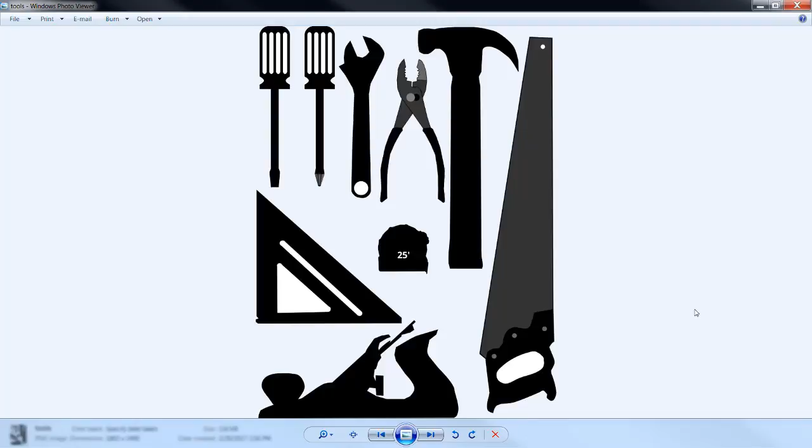What is also very nice is we have a bunch of tools that I just finished programming up for you. We're going to show you how to take what you need out of here for the sake of this tutorial. Okay? Let me pull in. This is one of the plaques right here. This is panel 44. This is what I made my shop sign on.

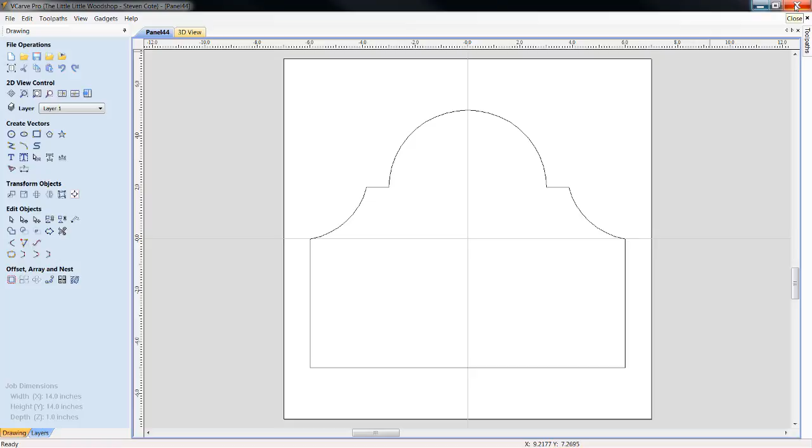And for the sake of not copying the exact same project, we're going to do a different sign layout, all right? So this is what I chose to do. I think that this looks very appropriate. It's going to look really sharp once this build is done.

First thing you're going to do is you're going to go up to your job dimension and origin. Now, for the sake of this one, I've put it on a piece of 30 by 20. We're going to use 1.5 inch pine. My datum position is always in the center. I've told you that. My unit of measure in the United States is inches. And we're going to be going off the top of the material on the Z-axis.

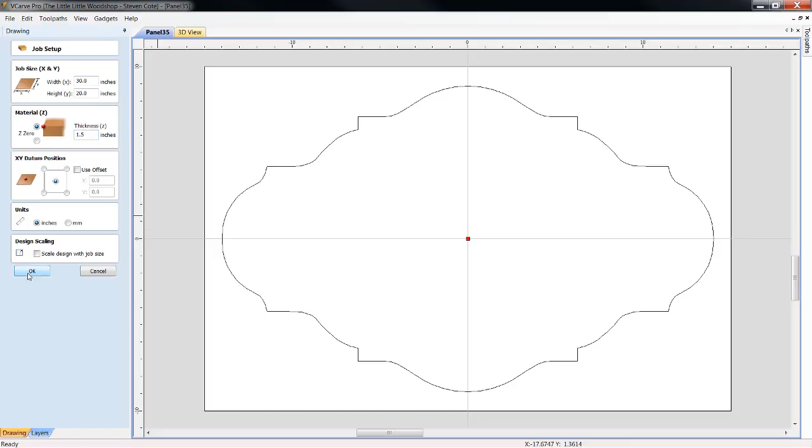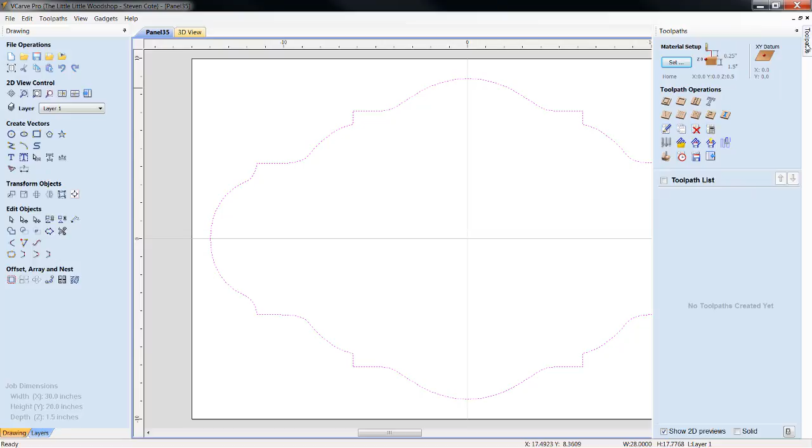We click OK. Now, ultimately, if you want to know exactly how big the exterior of your sign's going to be, we're going to click on Border. We're going to come down to Transform Objects, and we're going to look at object size. I know that I'm 28 inches wide by 17.776 inches tall. So 28 by 17 3/4 high. This will, in my opinion, make a very, very nice sign for the outside of your shop.

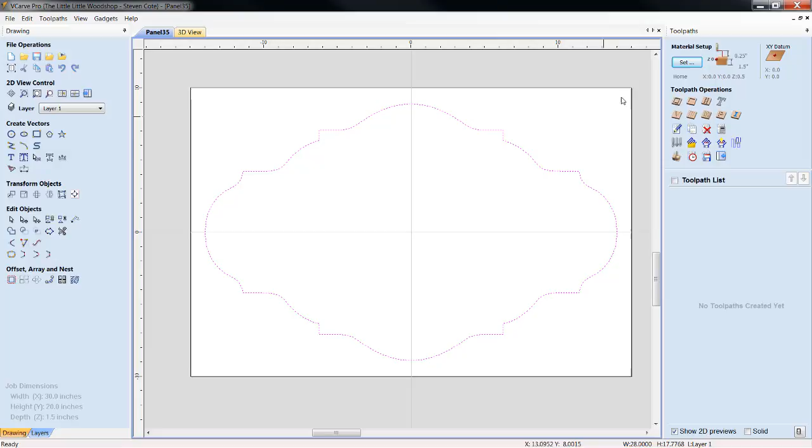All right. Well, I pretty much put a lot of bevels around things. So that's what we're going to do. Our first tool path here is going to be a 90-degree bevel around our outer edge. So I'm going to click on this. I am going to set a profile tool path in place. I'm going to want to take it down to a depth of 225 thousandths. Oh, one too many decimal points in there.

Like I said, CAD's the perfect child. It'll do exactly as it's told.

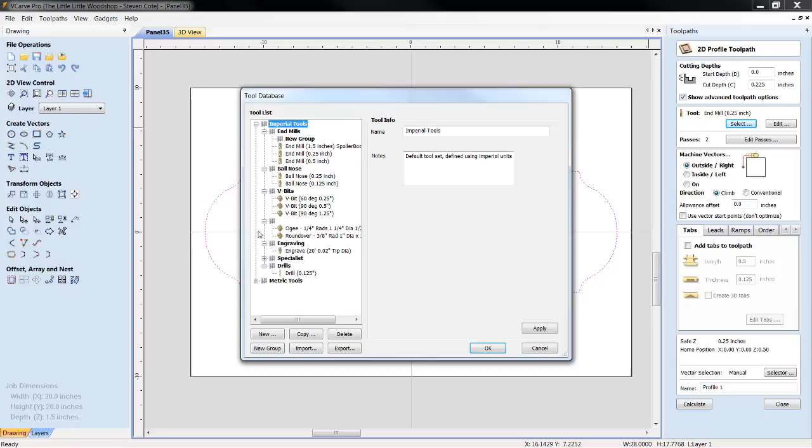I'm going to put this on the outside so that no matter where I mill, I will never lose my overall dimensions. If I come inside, well, I'll lose 1/4 of an inch all the way around, all right? We're going to select a, let me find it here, a V-bit, 90-degree, 1/2 inch. As I've told you in previous videos, always adjust your spindle, feed rate, and the information that's pertinent to your machine, to your tools, okay?

I am going to also run this conventionally, and this is going to be titled Outer Bevel. We're going to mill it. Okay, we can see the tool path is cut, but we are outside our dotted line. Alrighty.

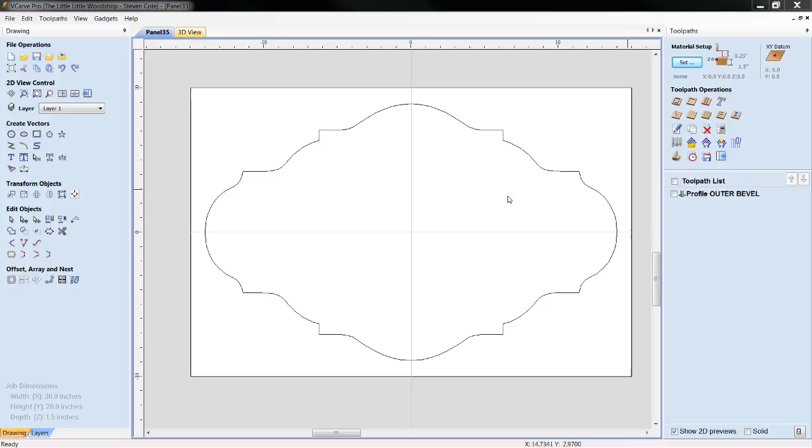Next thing we're going to do is we're going to think about an emblem. I had told you we were going to construct a logo on site. All right, well, that is exactly what we're going to do. I am going to come up to my import, or I could also go File, Open. For the sake of the video, I have already got this laid out in a folder. So what I'm going to do is I'm going to pull in the tools. Alrighty, so I want to highlight these. I'm going to move these off to the side.

My current function right now is selection mode, okay? I keep forgetting that I have a lot of newer guys following me on this stuff, so I don't mean to get ahead of myself, and if I do, I apologize.

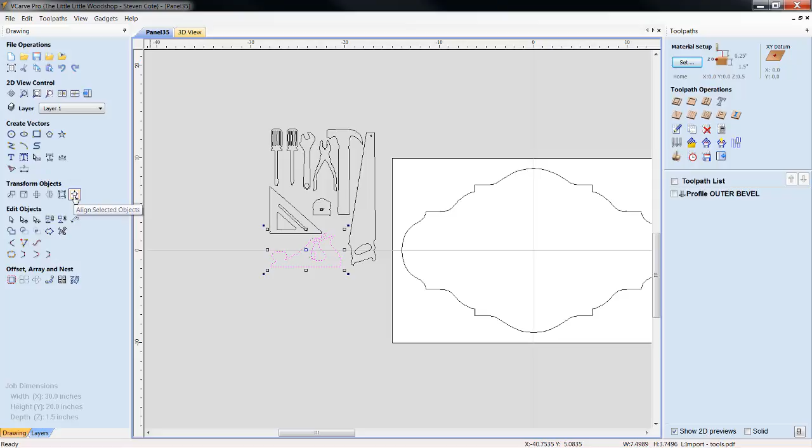The only tool I'm going to use for the sake of this is this plane. This is going to be part of our tutorial title. So I'm going to highlight this plane. I am going to click Align Selected Objects, and we're going to center him right smack dab in the middle of the material. He is perfectly aligned in the middle.

Now, what I want to do is look at his scale, and make sure that he is, in fact, going to work for this particular application. So, I am going to come over to Transform Objects, and I'm going to look at this object size. He's roughly 7.5 inches wide by 3.7496 or 3 3/4 high.

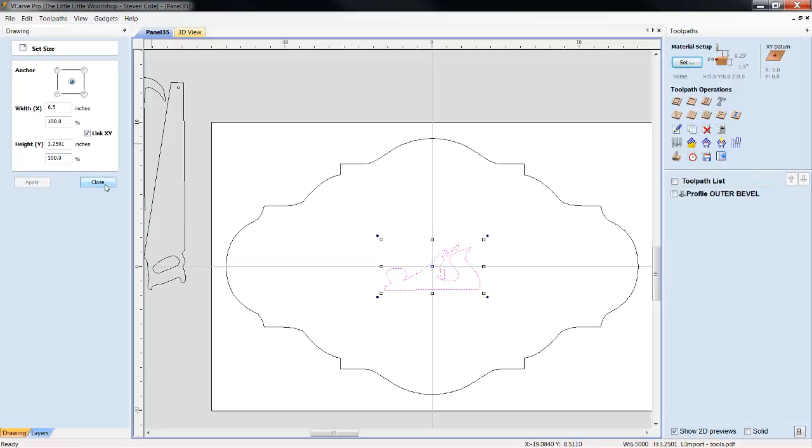Well, we're going to take him down, and as long as your link X and Y is checked, I've told you before, CAD will automatically compensate the other axis for you so that the ratio is even. We're going to go 6.5 on him. We're going to click Apply. That's not bad. So he's 3 1/4 high, but he's 6.5 wide. He's holding dead center.

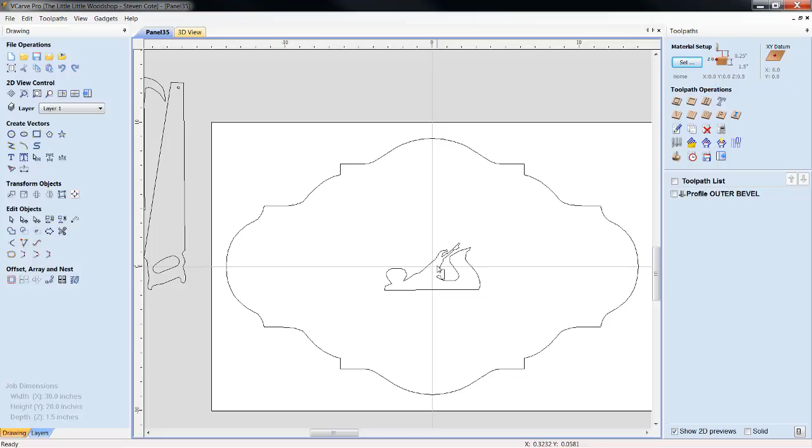Well, what I want to do is I really want to use him as my logo. We're going to name this fictitious business something like Plain Old Wood Shop, or something along that line, with the wood plane in the middle being the focal point. I know it's kind of corny, but for the sake of it, I want to create an outline to go around him.

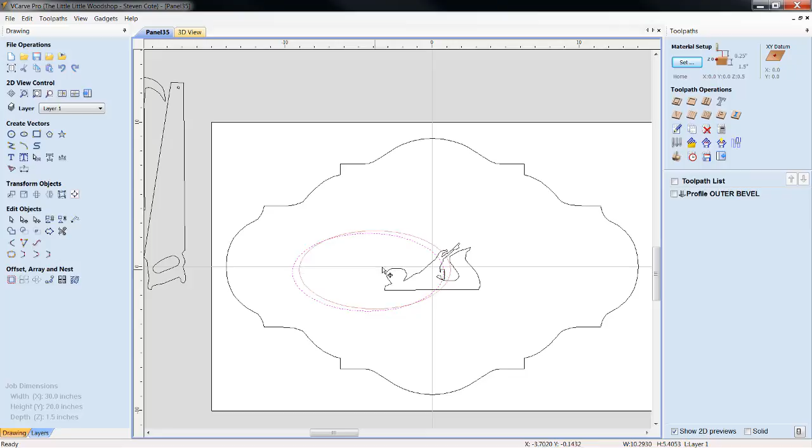I merely clicked on my Draw Ellipse, and we pulled our Ellipse tool in. And now we're going to center him. Now you can do this in one of two ways again. You can drag your center node, put him in the middle of the workpiece, or you can also pull up your Align Selected Objects, hit your alignment for dead center. Okay?

Well, I'm looking at this, and I'm not sure if he's too big or too small yet. Well, we're going to look at object size again. We'll go with 10.25. Maybe we'll go with a 10.5. Just a titch more. And it will make the height 5.5 inches roughly. Okay, I like that.

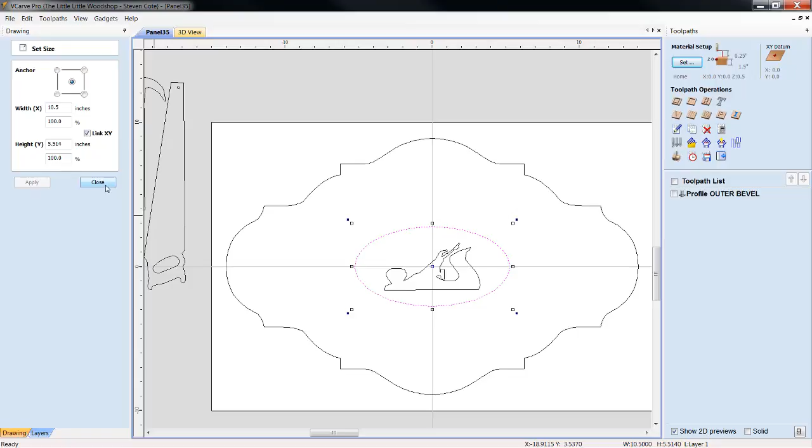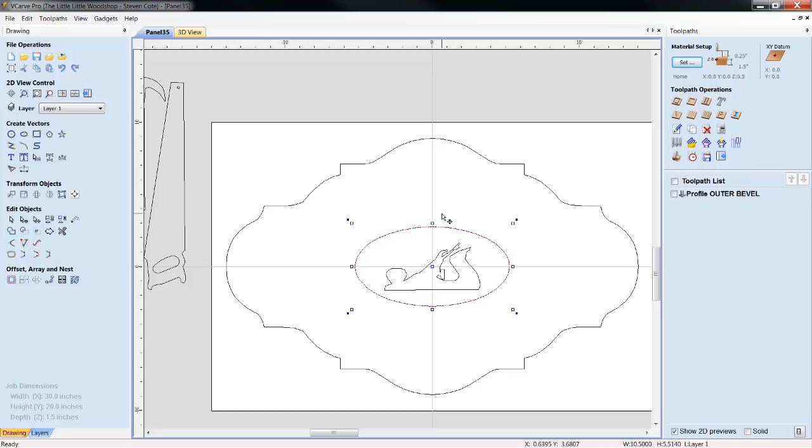We see this now. Well, what we're going to do here is we're going to duplicate this. We're going to double click on it. We're going to right click. We're going to copy. We're going to right click. We're going to click paste. With that second one that we just created, I'm going to pull him out a little. I'm going to stop. I'm going to hit the alignment tool. I'm going to recenter him.

I'm going to come down, and I am going to check out in Transform Objects the object size. Now, I would like at least 1/4 inch around this center focal piece, okay? So, we knew that he was 10.5. Well, we're going to take him up to 11.5. We're going to click Apply.

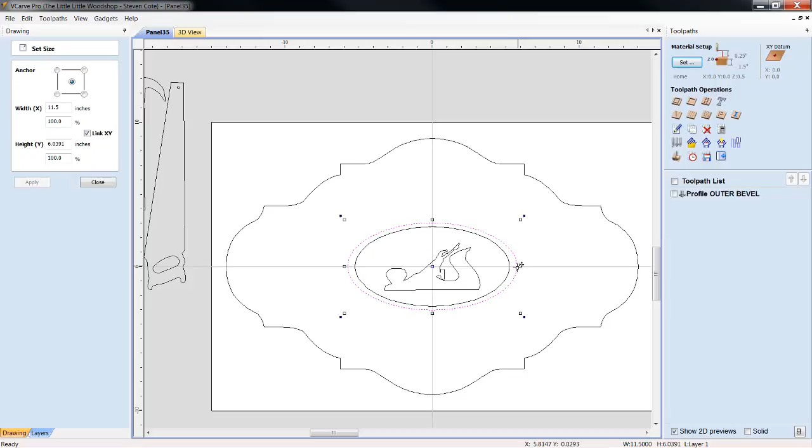Now, we've already compensated in CAD, but I can still see that the width here is a little bit off. So what we're going to do is we're going to slide one side in. You can eyeball this, okay? This is just for practice anyways. We're going to come back up to our alignment, and we're going to recenter him. All right. This is basically going to be our logo for this particular fictitious sign company.

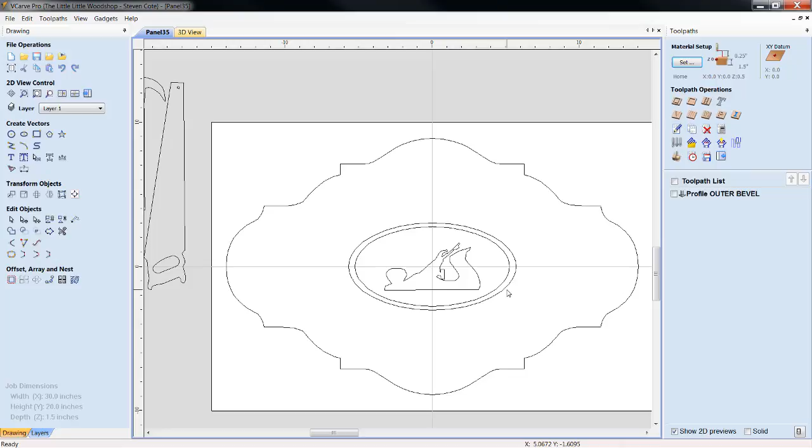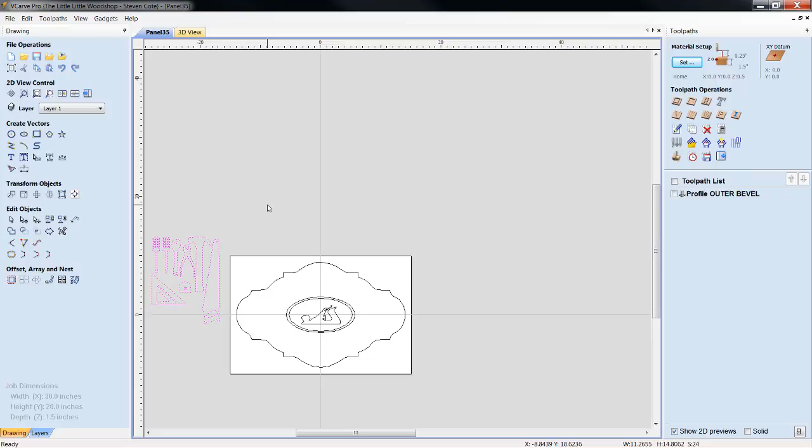Okay, now if there's nothing over here that you need, you can highlight all of it in your selection mode. Click on selection mode, hold down your left key, highlight all of it, hit the delete key on your keyboard. To basically scale him in or out, enlarge him or shrink him, you use the wheel on your mouse.

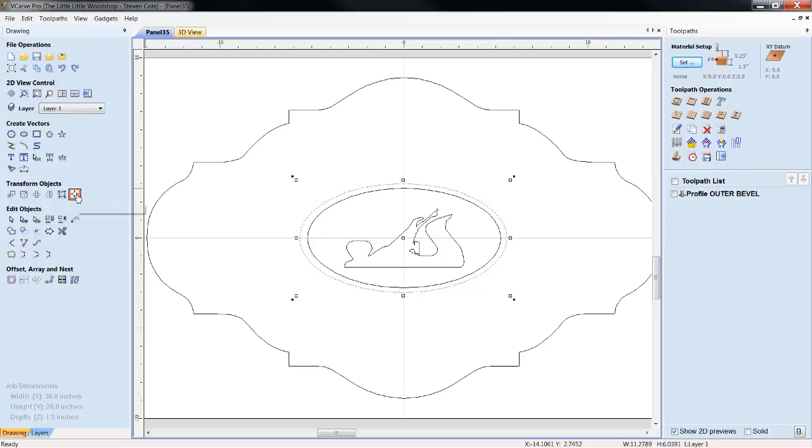Now, I can see that this still looks a little wider here than up here. I am still going to push him in just a little bit. I'm going to come back to transform objects again, align material in the center. Alrighty. So I'm happy with that. That looks pretty sharp.

Now, we told you that we wanted to utilize this plaque in the emblem, but also, like my own that will be in the corner of this YouTube video, I want to put this gentleman's initials in here. So let's say that this is James Smith. This is John Smith's twin brother, okay?

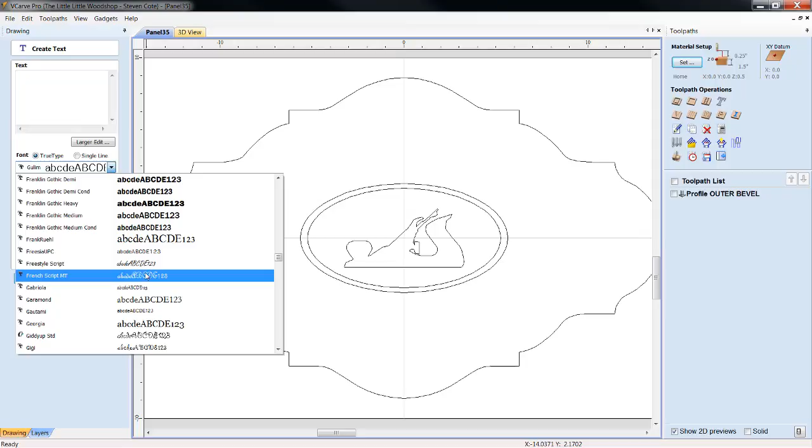We're going to go to our font now, and we're going to go to our draw text. Determine what you want to use for text. I'm going to kind of fly blind with this, which I normally don't like to do, but we'll look at a French script, and we're gonna bold out the letters.

For the point of this example, it really doesn't matter where we have it because we're going to move it. But we're going to put in J and S. Let's apply it, see what it looks like.

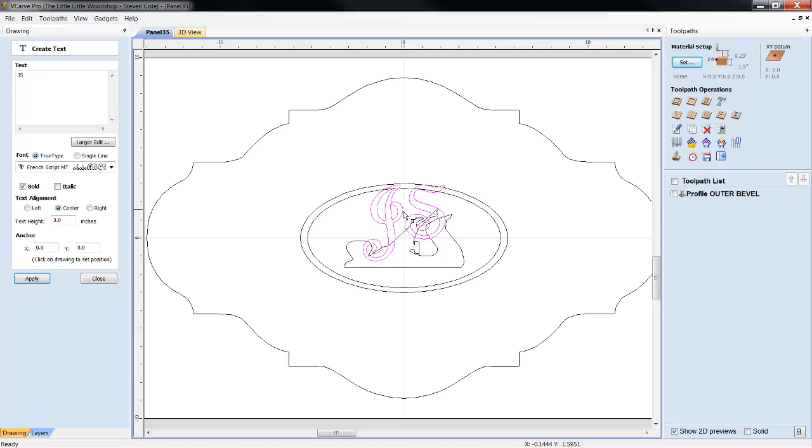I like a lot of the Old English. I like the calligraphy, I like script. I think that's a little too off the top, though. So let's try a different font. I'm also a very big fan of... I do like Lucida. So maybe we'll run with that.

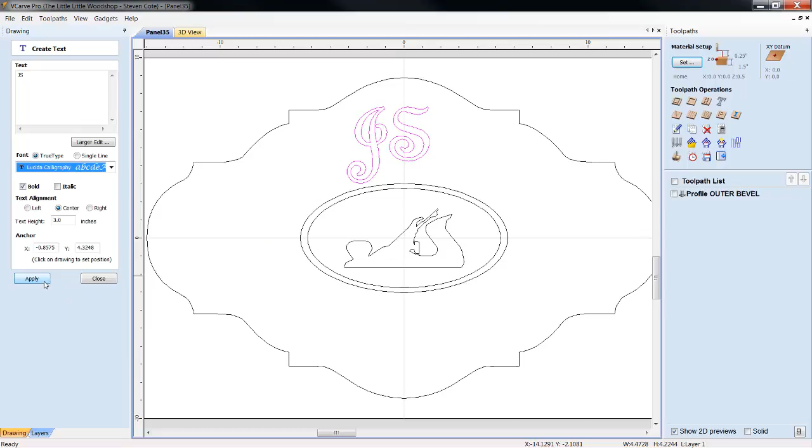And these are just my personal preferences, but as you can see, there is a heap load of text and font here to choose from. So, you know, plan carefully and choose what it is you want. Lucida calligraphy, okay, let's apply that. That to me doesn't look too bad.

Now the text height is 3 inches. We're going to need to readjust the text height so it'll actually fit. We're going to put the text right about in here. Your text height we just adjusted to 2 inches. That looks like it will fit.

Drag him in. Well, the name that we're going to use here, let's go back into our text. Oh, gotta click twice, I'm sorry. I'm gonna put my text height at 2.5 for this particular situation, okay? We're going to call this James Plain Old.

Okay, we're going to start with that. Now, like I told you, it's going to be a little corny, but James Smith, this is going to be his logo that eventually is going to end up on his business card and everything else, okay? We're going to click Apply.

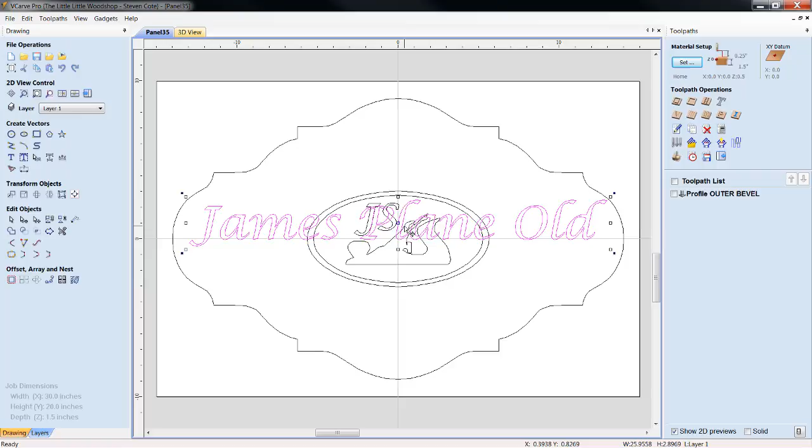Now, I want to take this name and I want to move it up into place here. However, we're going to put an arch to it. Alrighty, the way we do that is we come into Create Vectors, Edit Spacing, Edit Text Spacing and Curve. We're going to click on that.

We see 2 green boxes with our center node. Well, if we pull the bottom one, it's going to obviously pull it in the wrong direction. So we're going to take the top one, we're going to pull him, we're going to grab our center node, and we're going to bring him back down.

Now, here's the problem that I have right off the top. We'll go into our alignment tools and we will center. Okay, now this is my problem. The J is underneath the center x-axis line, but old up here is above. It just, I don't like it.

So what we're gonna do here is we're gonna fiddle back and forth with this for a moment, okay? I'm gonna pull him up a little bit more. I'm gonna pull him back down. Now I like the font, I like everything about the size.

Now the J is still below our x-axis center line. So what we're going to do is we're going to come in, and here's a little trick. You can take your, without clicking on the text, we're going to start with the J. See the little addition sign? Left click. And you see our font moving in. Well, we've got 2 there.

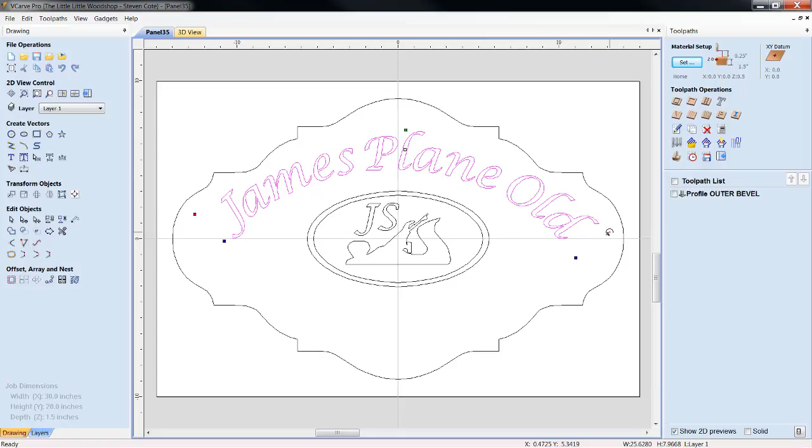The one thing we could do if we wanted is keep cheating him like that. This is the nice thing about this software, and I don't mean for this to take so long, but I really want to give everybody a good example. I want to keep the font from this half of our sign above our horizontal x-axis line. I don't want stuff rolling down below.

Okay, we're going to get into text. Again, we're going to type in woodworking. I'm going to go bold. We're going to keep the same font height as well, and we're going to click apply. Close. Highlight him, drag him down. We're going to do the same thing.

Now, if we were a little bit shorter here, and we didn't have anything hanging off the outside of the frame, well, that would be one thing, but we do. So we are, in fact, going to put a curve on him. Same thing, instead of pulling him up, we're going to pull this one down. Pull him in, center him. He's still not quite where I want him.

Now, we can see that we have a lot of space between our letters. Again, come in and keep track of how many clicks you use. Okay, I did 3 there. I'm going to do 3 here. I'm going to do 3 here. Same thing up here, 2, 2, 2. You get the idea. I can actually probably go another one. Eyeball your space.

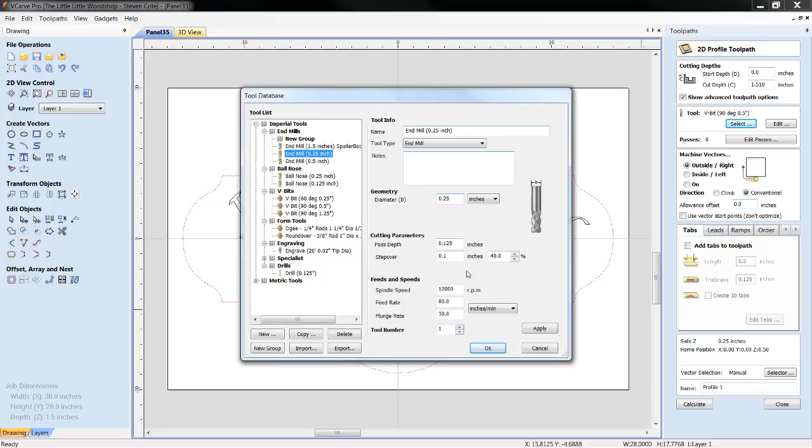We need to go to the outside. If you go inside or on, you're going to cut that beautiful bevel off that you just worked so hard to get in there. Now we have to change our bit out, to a 1/4 inch end mill. Again, set your feeds and speeds to what's best for your particular machine, router or spindle.

We need to add tabs. We're now going to edit them, and we're going to say probably 10 will suffice. We can show you how to put more in here in just a second. We're going to add all these tabs.

Now, my advice here: move these out to the flat. If you've got to cut anything out of a corner or a radius, it's a pain in the butt. Move them right out on the flat - saves you a little bit of headache later. You obviously want one on each corner here. Just move them out.

Left clicker on your mouse. Now I want one exactly at the top - one quick left click. Same thing on the bottom here, quick left click. We're going to close this out.

Now, this is important because we put in a 200 thousandths deep, 90-degree V-bit bevel around this on the outside. You want to do an offset - you're going to want to offset the tool, the end mill that's going to cut this out. You do want to offset it, because if you don't, you're going to cut into that beautiful bevel or cut it completely out, okay? So we went 200 thousandths deep, we're going to offset it 200 thousandths.

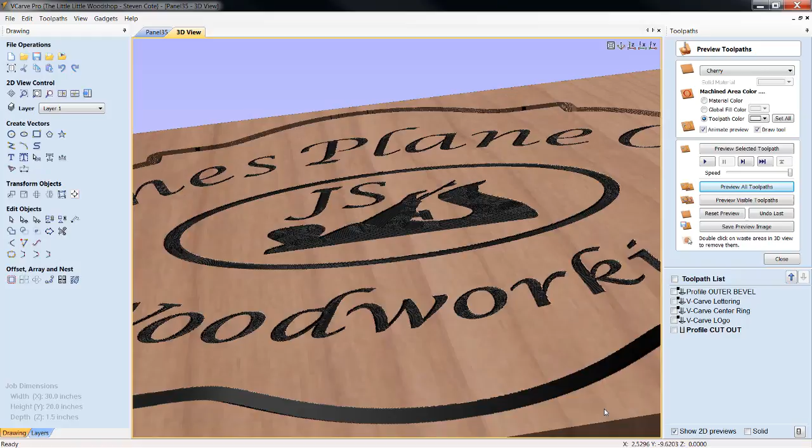Now the last thing I want to do before I initiate the cut is go back in and double check my toolpaths, my cutting depths. Okay, so I went 225 thousandths deep. I've already caught a mistake. Let's close him out, let's go to our cutout, let's readjust our offset and add another 25 thousandths. Calculate. Great, now we can close him.

Let's go in and look at our lettering. We are in fact using a 60-degree V-bit. We are 0.04 and not 0.4. Trust me, this machine pays attention and follows your every order, okay? We want to make sure we're 40 thousandths and not 400.

We can close him. Let's check our center ring - same thing again, we're 40 thousandths, 60-degree V-bit. Nothing looks out of the ordinary. We're going to look at our logo - it's 40 thousandths, 60-degree V-bit. We look good there. We're going to come back.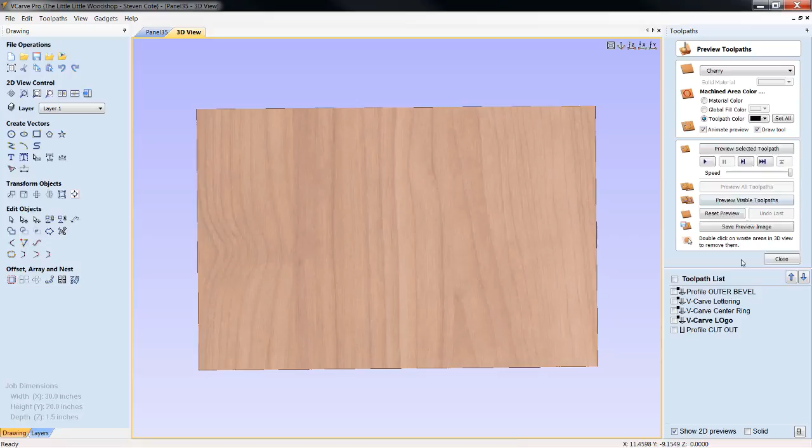We're going to reset the preview, and we will run it one last time. There we go - James, plain old woodworking. I admit it's corny, but that's basically the simplicity of doing a two-dimensional sign.

Like I said, this is only an example. You guys, if you follow this step by step, I hope I didn't talk too fast.